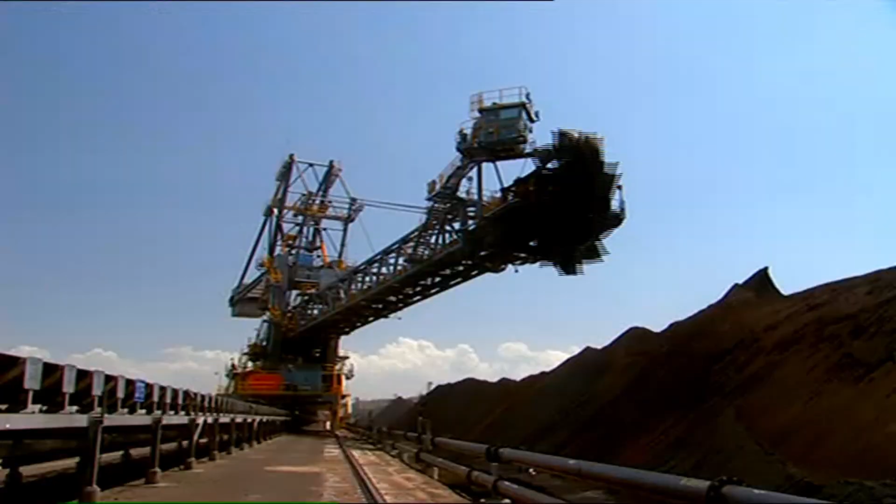I like to imagine things. I like to create things.

The uni course is a lot of fun actually. I found it great.

Engineering's a super job. The world's pretty much your oyster. You can go anywhere with engineering. It's a lot of fun actually.

Take a good look around. An engineer played a major part in the buildings, the bridges, the roads and the machines that we use every day. Engineers create, they find solutions and they push the boundaries of science and technology. A career in engineering is exciting, it's fun, it's cool and it could take you anywhere in the world.

Engineering involves using basic skills in maths and science to create something new that will hopefully benefit other people. It's a university degree course.

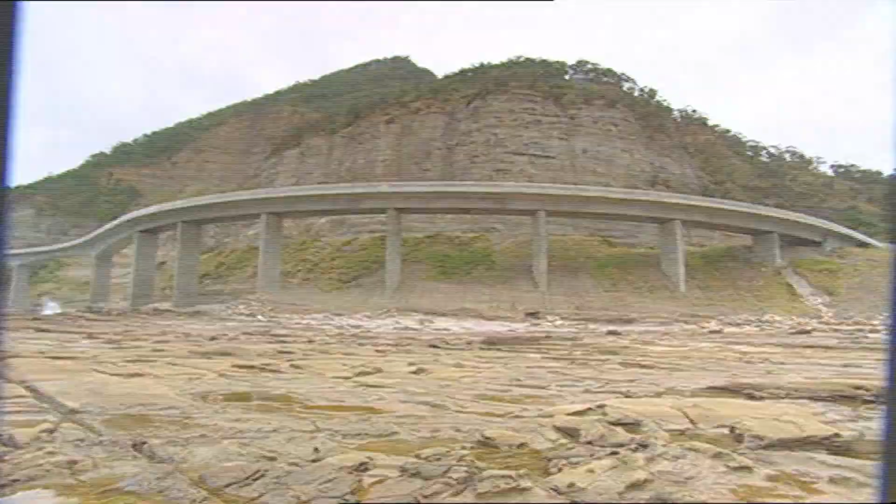This is Telstra Dome in Melbourne. It seats 56,000 people, all with uninterrupted views. AFL games are played here, rugby, soccer, and some of the biggest names in the music and entertainment industry have their concerts here. A couple of unique features.

The seats on this side and on this side can actually slide in and out, depending on the event that's being held here. But most importantly, if it looks like rain, they can simply close over this gigantic roof and make a massive indoor stadium. And this was all made possible by Australian engineers.

I started when I was only 9 months out of university and spent 2.5 years working on the project. Learned a lot of tricks of the trade down here.

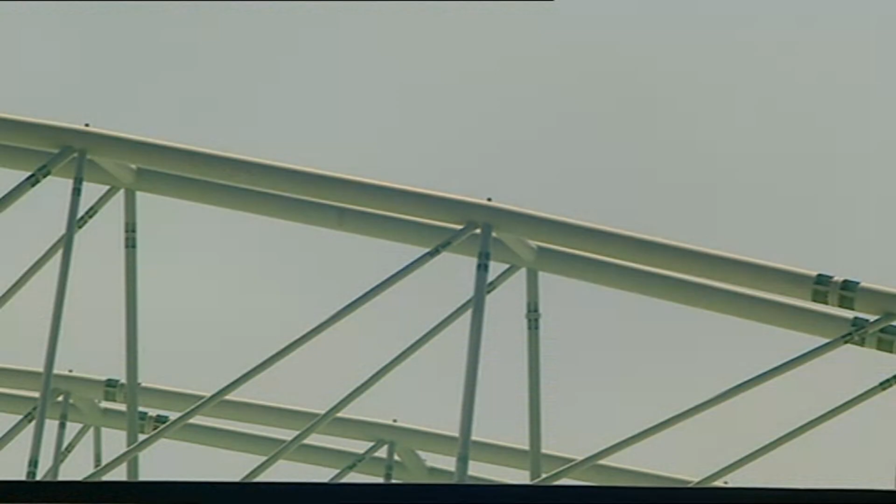Structural engineering, which is the discipline that I work in, is essentially involved in the design of literally the structure required to support buildings. We work closely with architects and builders to come up with systems that will support the building that they're trying to achieve.

Early on in the project I was involved in the design of the concrete superstructure, so the large concrete elements required to support all the seating tier, and as the project progressed I was involved more and more in the site activities, responding to the builders' queries, changes and things of that nature.

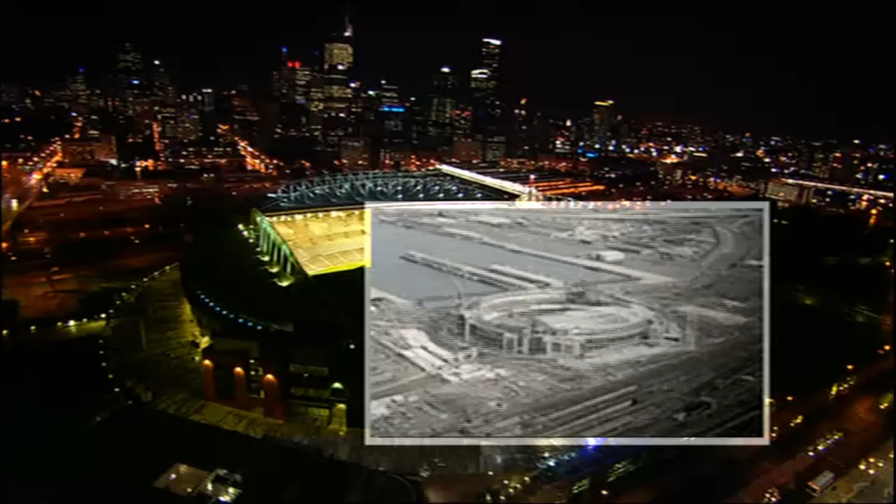The key feature of the stadium is the roof. As I understand it, it was certainly the largest moving roof over a sporting stadium in Australia and one of the largest in the world at the time of construction.

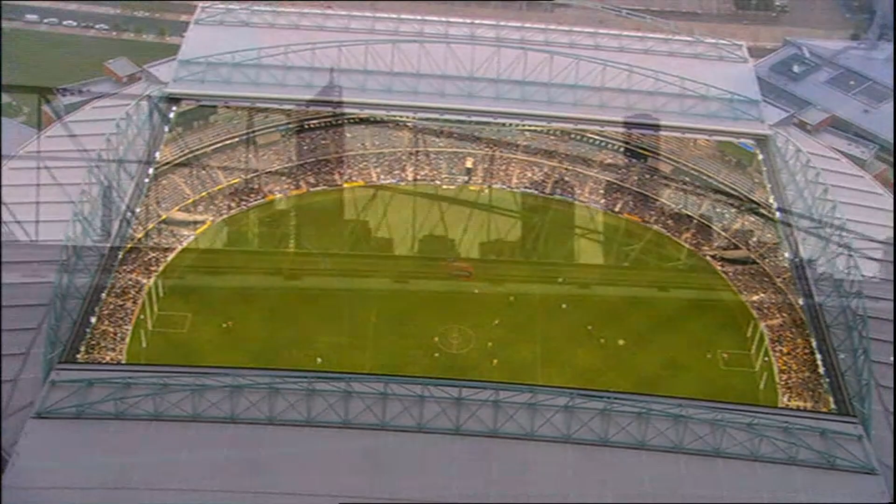We have 4 major trusses that support each of the edges of the fixed roof structure, which leaves a 100 metre by 150 metre opening above the playing surface. And then we have the moving roof which slides over the top of those to close that opening.

The moving roof is supported by 8 sets of wheels, which we call bogies. The bogies actually drive the structure as well. It takes about 10 minutes to open and close the roof. This feature allows all events to be held in ideal conditions, day or night, regardless of the weather outside.

I come here and watch footy with friends and everybody enjoys this experience, and sport is such a part of Melbourne culture, and to be a part of that is a great thing.

There's a little place called Yambuk on the coast of Victoria, about 300 kilometres west of Melbourne, which houses one of the most cutting-edge electricity generating plants in the country.

There's 20 wind turbines on this wind farm. They're 73 metres to the actual hub, the centre of the blades. From the centre of the blades to the tip of the blades is another 35 metres. So in total you've got 108 metres from the ground.

The basic principle of a wind farm is that the wind energy will be converted into kinetic energy, and that in itself will then get transferred into electrical energy in the generator, and the generator is housed up in the top of the wind turbine.

As a rule of thumb, a wind turbine of this size will generate enough electricity to run the equivalent of 1,000 homes. I was the eyes and ears of the client on site, so when there were engineering issues that came up, I would be in discussions with the head contractor about those issues and how they would be resolved, and communicating that to the client.

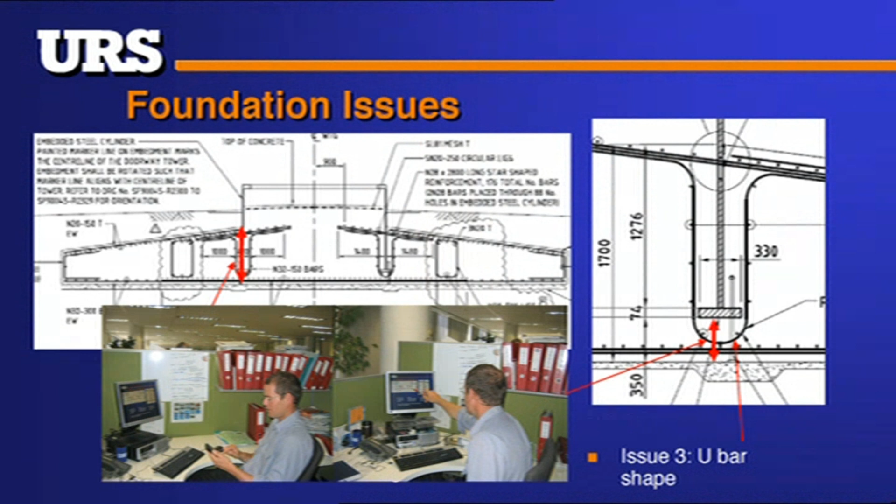The concrete and steel foundations were made to withstand the massive forces generated by the wind. In total there's about 260 cubic metres of concrete there, 60 to 70 truckloads of concrete delivered into the foundation. So it's a huge volume.

Wind farms are basically renewable energy, so as long as the wind's blowing it's producing electricity. Yeah, it's great. It's good to be involved in projects that have got renewable energy, it's benefiting the community and it's not compromising the future generations. And yeah, it's great to see them spinning.

Now, sometimes engineers are asked to come up with solutions to very unique problems. On the New South Wales coast, this road between Clifton and Coalcliff was cut by rockfalls and landslides, effectively isolating the two centres. So a very talented group of engineers got their heads together and came up with this, the Seacliff Bridge on the Lawrence Hargrave Drive, the only bridge of its kind anywhere in the world, 665 metres of pure engineering brilliance.

The new bridge is a vast contrast to the old road built into the hillside. The road would be closed whenever there was over a certain level of rainfall because the road would become so unstable. And in August 2003, the road was officially closed after a very significant rockfall.

A group of consulting engineers came up with 26 options to solve the problem, including tunnelling through the hillside. But the bridge solution was thought to be the best. Essentially, we shifted the road 30 metres away from the coastline, out of the rockfall zone.

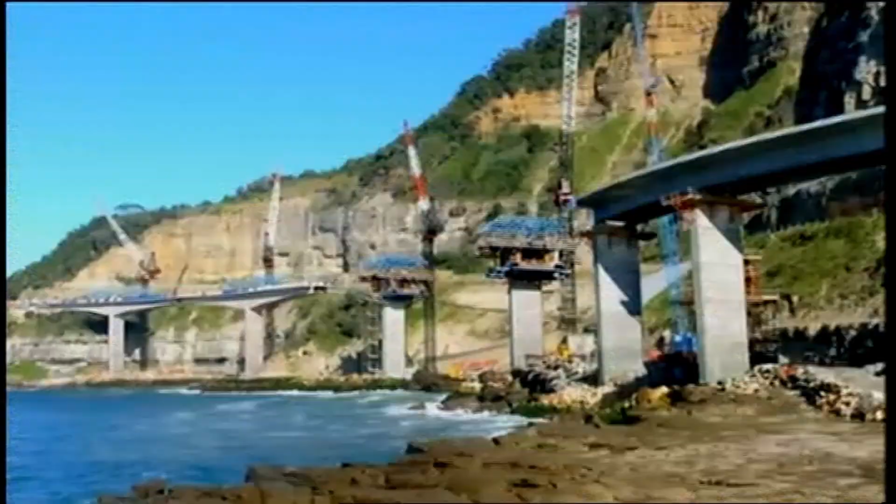The engineering team came up with a world-first method of construction, which involved building two bridges joined in the middle. In order to build one of the bridges, we brought in form travellers over from Europe, and essentially they sit at the supports and you build part of the bridge, and then once that part is finished, they lift up on rails, move out, and then you start building the next section.

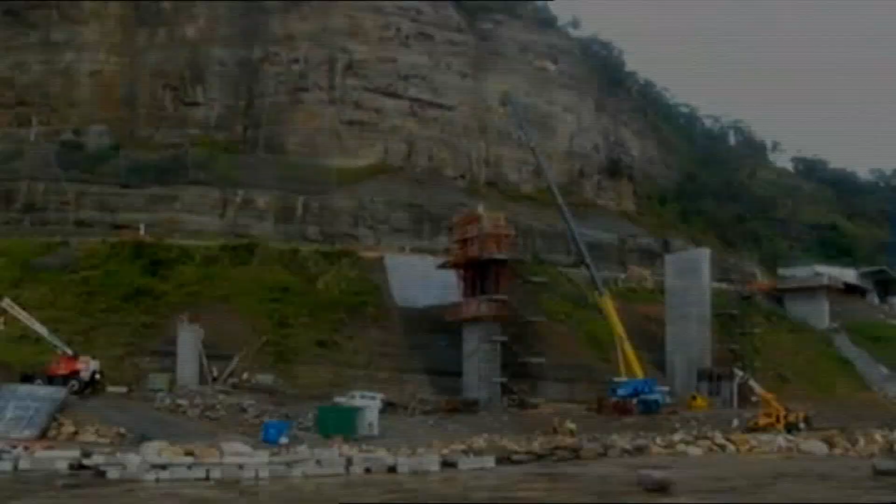The other part of the bridge was built by incremental launch, so you build part of the bridge in a casting yard, and then you jack it up and push it along its supports, and you keep doing that until it gets to the other end of the bridge. It's beautiful to look at, and it's just great to have been a part of.

State-of-the-art engineering was applied to create this unique building: Melbourne's Council House 2, or CH2. It's Australia's most environmentally friendly office building and one of the greenest buildings in the world.

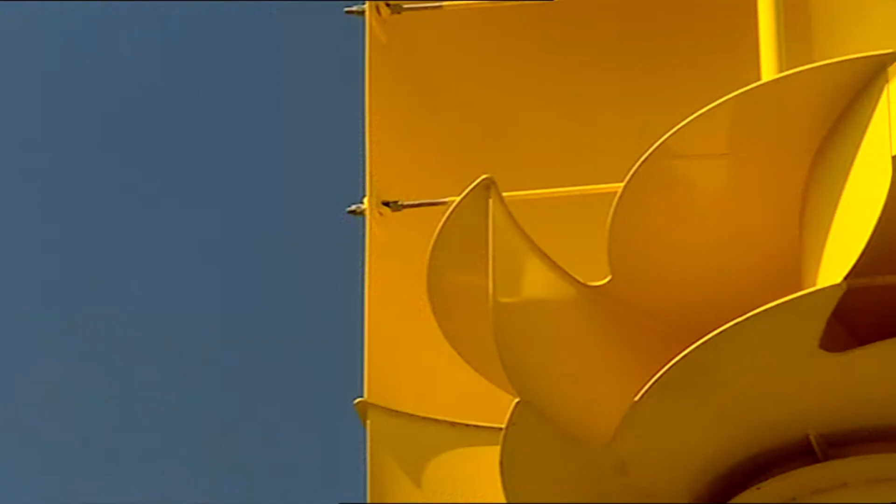We designed the skeleton of the building, the floor structure, the columns, the walls, the floors, how the building goes together and how it stands up.

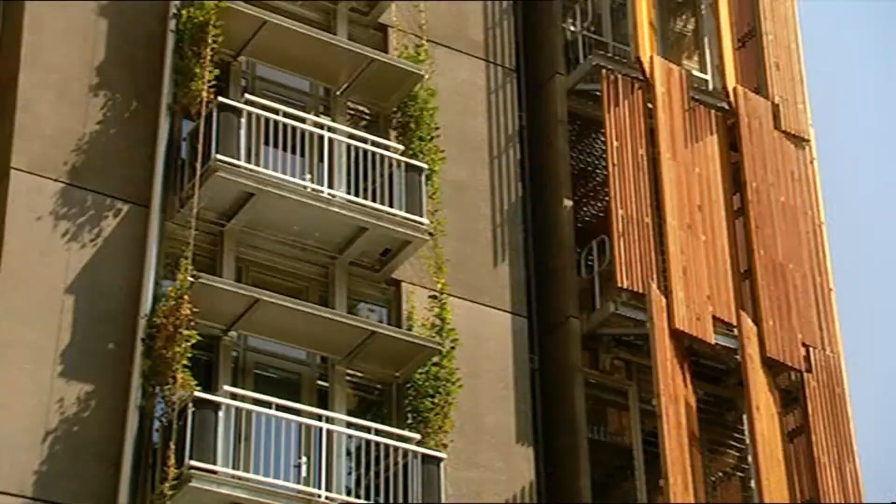All materials used in CH2 had the lowest possible energy consumption to produce. The concrete has a special additive which significantly reduces the cement content. Now, cement production is a significant contributor to greenhouse gas emissions right around the world, so there's a massive benefit to the environment.

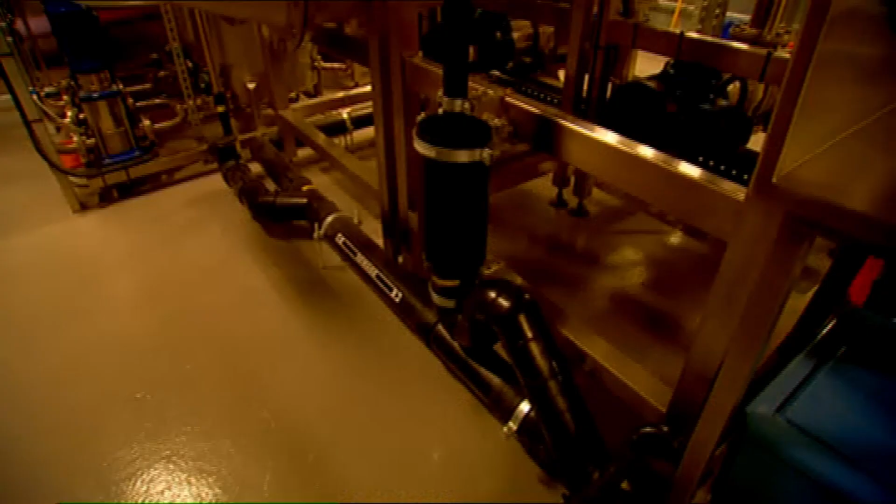The recycled timber slats on the outside of the building move with the sun to provide shade, which helps cool the building. Sewage water is cleaned and chilled, then run through panels in the ceiling. This cools warm office air as it rises, circulating cool air through the building.

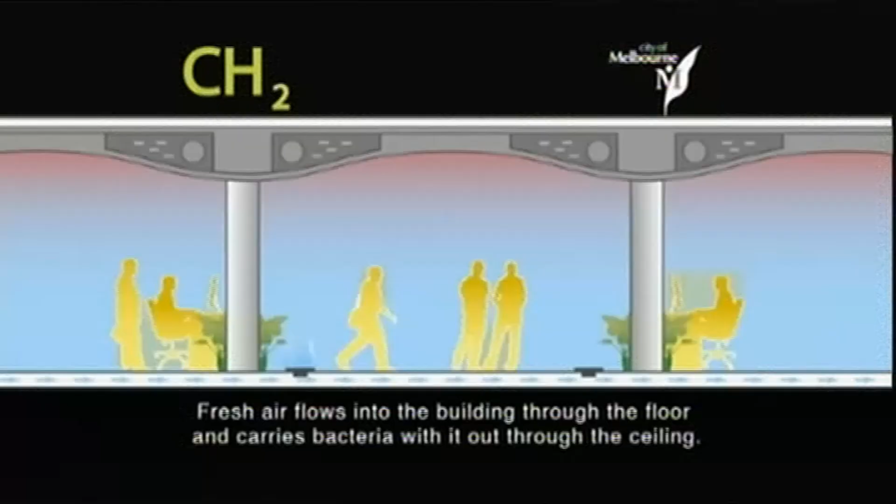100% fresh air is ducted through the floor and exits through vents in the ceiling. Water falling through these shower towers cools the air within the tubes. This cool air is then used to air-condition shops at the bottom of the building.

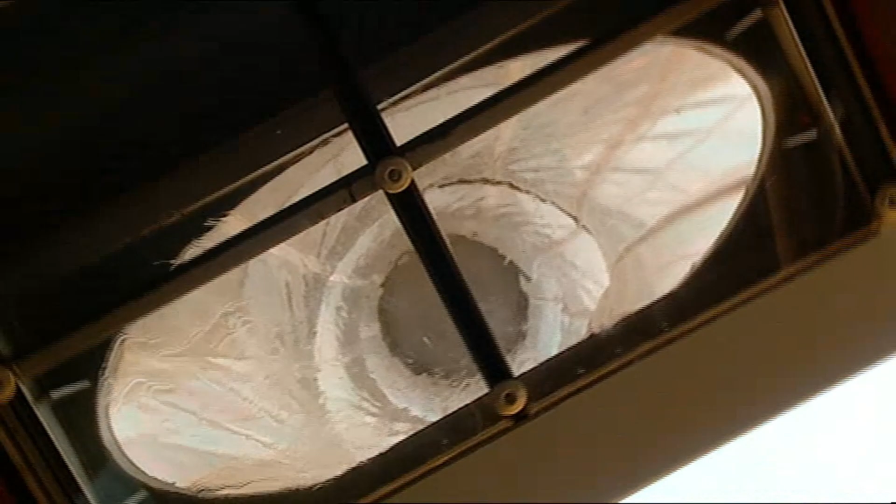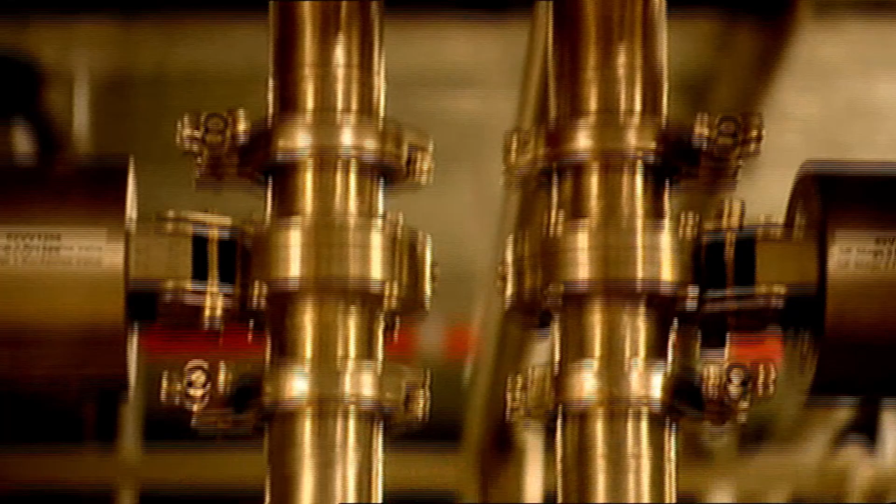The occupants will work and live in a healthy environment. The council is hoping that this flagship will set a very good example for other commercial developers. I feel very proud to be involved in a project like this.

Gerald Stewart often gets to work with rock stars and celebrities in his engineering job, designing studios for recording companies and radio stations.

I guess the difference between an acoustic engineer and a sound engineer is the acoustic engineer actually makes the environment, and the sound engineer makes the sound. I got into it with a love of music. When I was about 9 years old, I had my first guitar. Gerald designed this state-of-the-art mastering DVD authoring studio at Sony BMG in Sydney.

It's used to produce 5.1 surround sound for DVDs. The aim of the design was to make the sound as smooth and clear as possible right in front of the console, where the sound engineer sits when mixing music through the 6 speakers. The room is designed so that it actually moves bad sound, for want of a better word, to somewhere other than where the engineer is sitting.

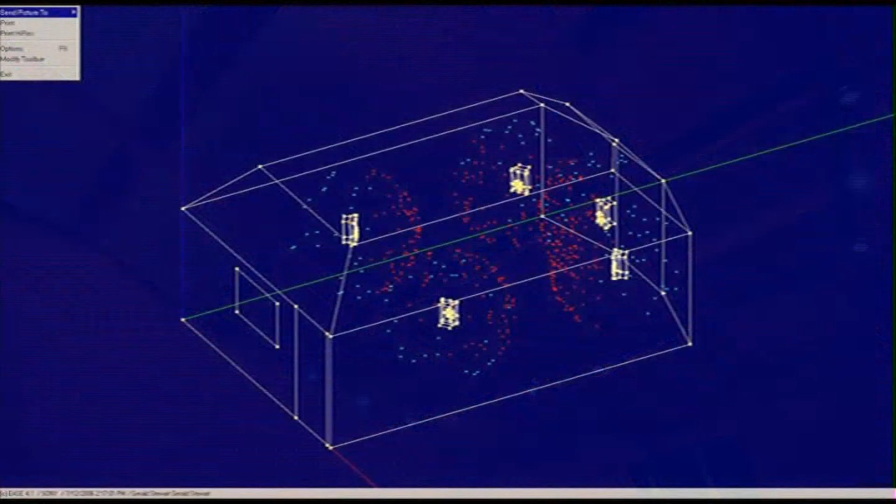The walls and ceiling have special shapes and surfaces that either reflect or absorb sound waves to create that perfect sweet spot right in front of the console. This jagged surface has got a slot in it, and the sound that it's going to take out is a dipping of my voice, and you can hear how that's actually sucking quite a lot of energy out of the low-mid frequency. Next one along is a full-range absorber. You can hear how it really softens and it deadens what would be a bright surface down to very dead.

The floor is flat and smooth, providing an unwanted reflective surface. So the ceiling is actually developed up so that it actually reflects energy and reflects sound away from the floor. I guess from an engineering perspective, it's nice to look back and go, I did that.

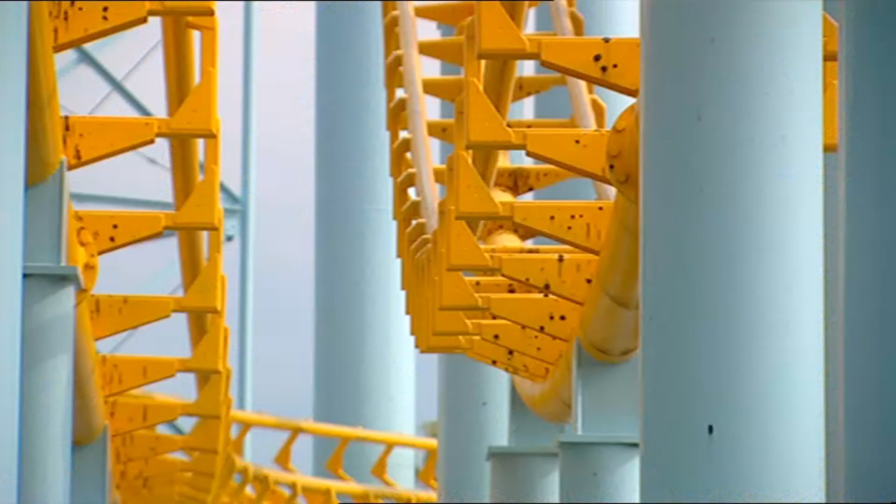People think that engineering is all about sitting in a quiet office, crunching numbers and writing reports. But I'm here to tell you that couldn't be further from the truth.

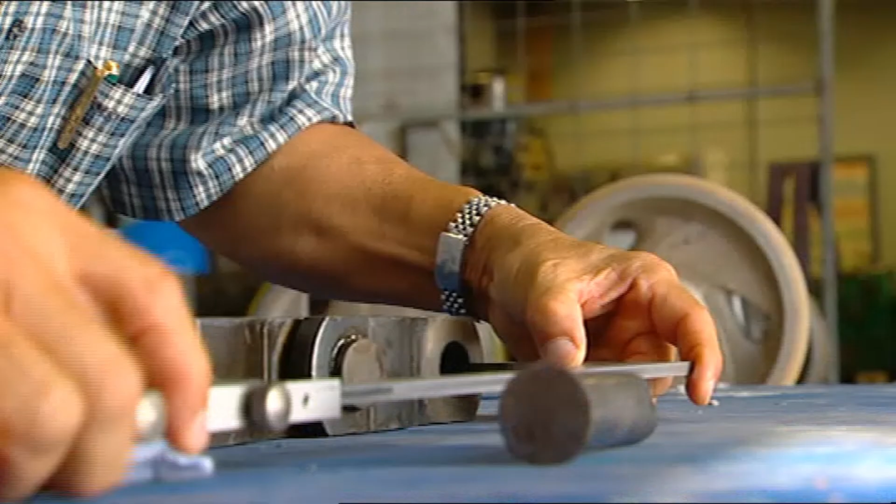Oh, it's a great job. Well, I get to do many aspects of engineering, not what you would face in a normal engineering job. Bob Tan heads up the engineering and maintenance team at Dreamworld on the Gold Coast. In his role, he spends his time travelling the world, finding the latest thrill rides, then supervises their construction and maintenance here at the park.

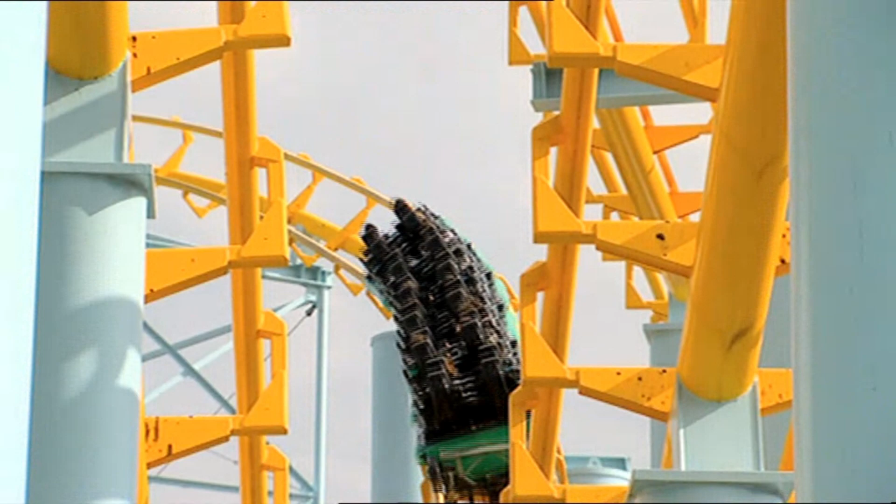This job here is very different and we have many engineering challenges. The Cyclone roller coaster is 13 stories high, 800 metres long and reaches speeds of more than 80 kilometres an hour. It had to be built strong and safe.

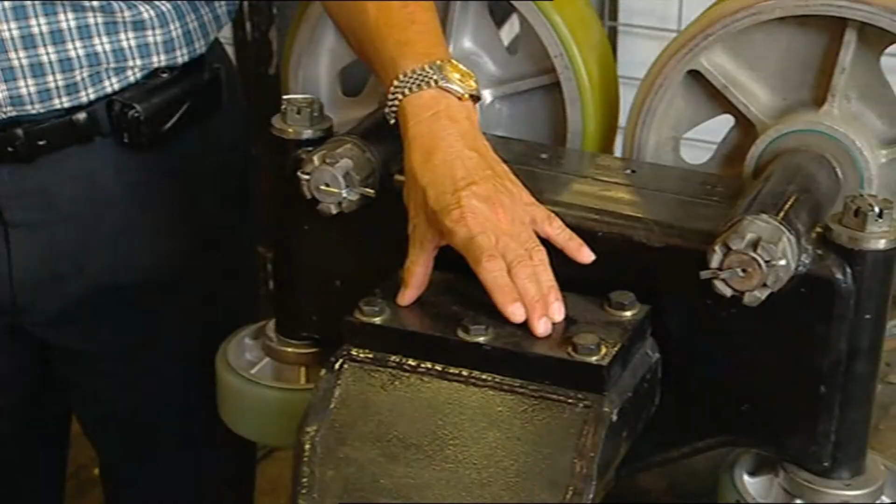In a roller coaster, there are safety factors that range from about 3 to 10. In simple terms, if it only needs to be so strong, it is between 3 to 10 times stronger. The track itself is sort of self-supporting between columns. You see, it's a little mini truss.

The other thing you would note is that bolted connection. They are usually made up of multiple bolts, so that there is redundancy in if any of the bolts should break in time. The extreme load or pressure on the carriage is really at the point before it goes into the loop, because that's where the maximum change of direction occurs, and that's where the highest stresses occur.

Bob Tan is an engineer who loves to see people enjoying the result of his work. It gives me a great sense of achievement when we finally commission a ride and complete the attraction, and the first lot of riders go through and come out smiling.

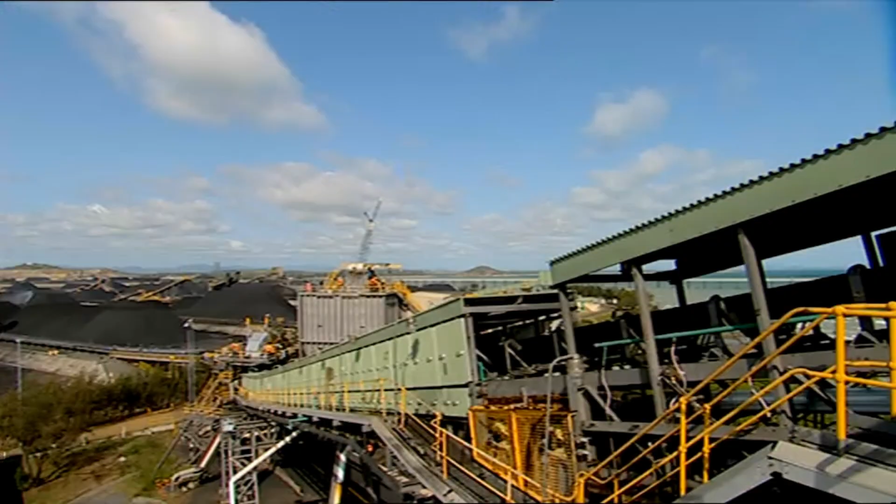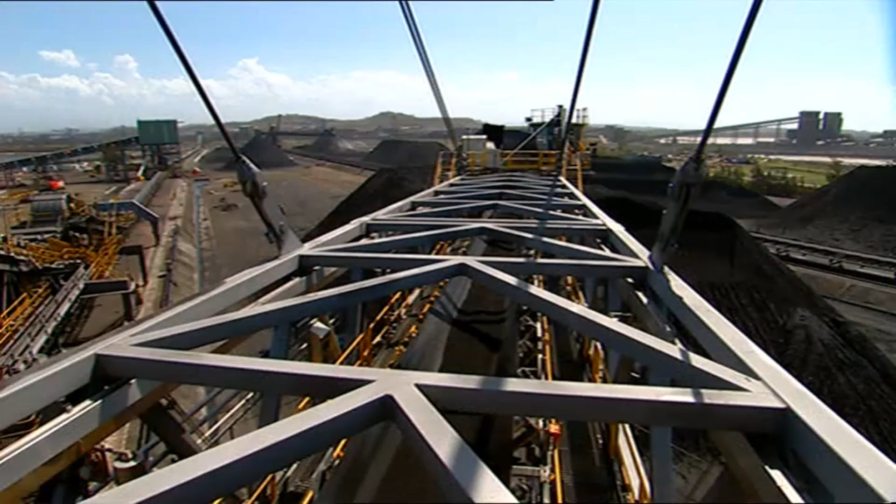The Hay Point Coal Terminal near Mackay on Queensland's north coast stores coal from major mines, then loads it onto ships for export overseas. This massive site is a great training ground for young engineers.

I'm a mechanical engineer and I work with the design team, the people that design upgrades to the terminal. And I'm here supervising some construction, helping them sort out any issues that they have during construction.

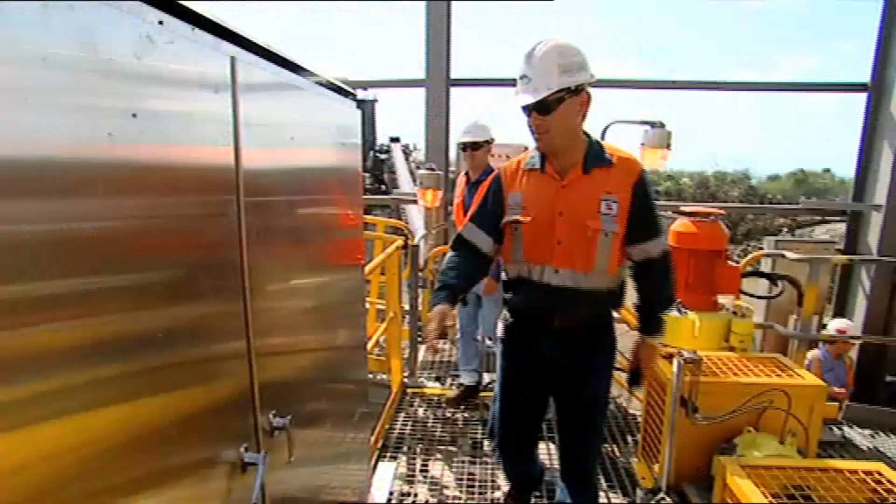Engineering is really about problem solving. Being able to get out there and see where the issues are and sort a solution out is probably a very important skill.

The stacker reclaimers here are very interesting from an engineering perspective. This is one of the largest stacker reclaimers in Australia.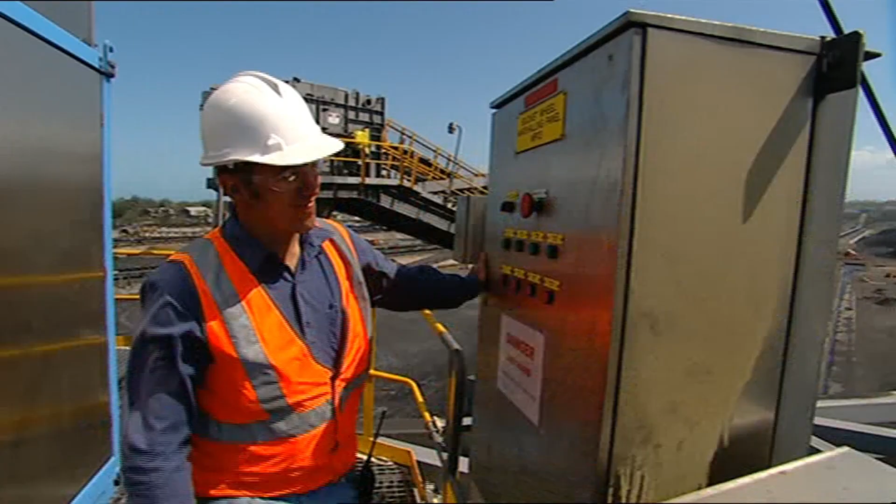What it does is it places coal into a stockpile and then it can pick it up again, put it on a conveyor. This stacker reclaimer is capable of around about 4,500 tonnes per hour reclaiming and up to about 6,000 tonnes per hour when it's stacking.

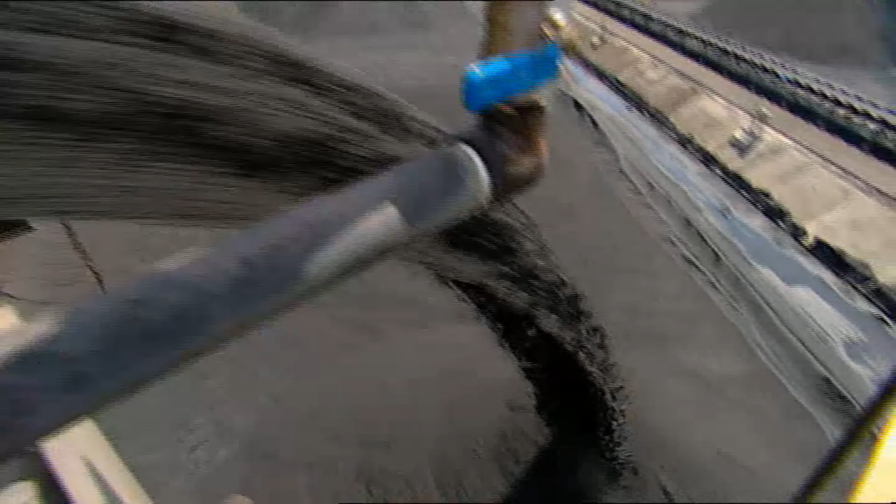As far as size goes, the boom itself is about 50 metres long, so it's about the size of an Olympic swimming pool.

Mechanical engineers design things on stacker reclaimers such as the conveyors. They also design all the drives that allow the machine to move, to rotate, and lift the boom up and down.

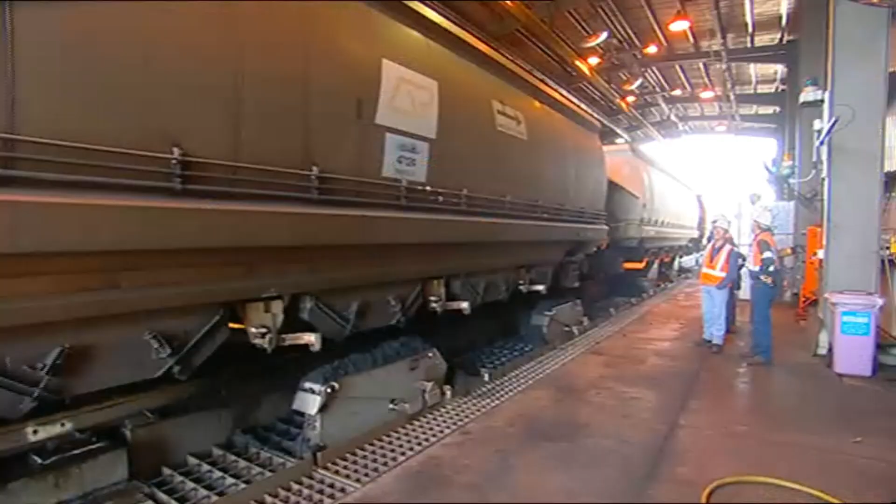I think all big machines like these really show you what engineering can do, and that engineering is all about people working together. It's a lot of fun actually.

Jonathan Wang is a young Australian engineer specialising in high-rise buildings. He's employed by an Australian company but has worked on cutting-edge projects all around the world.

The Latitude building in Sydney CBD was one of his major works. My role in this building is to design the vertical element of the building, okay, the columns. I came up with the way of how to build the building.

The building stands 52 floors, or 211 metres tall. It's great to be back here to have a look at a finished piece, and I'm very proud of this project. It's really, really good.

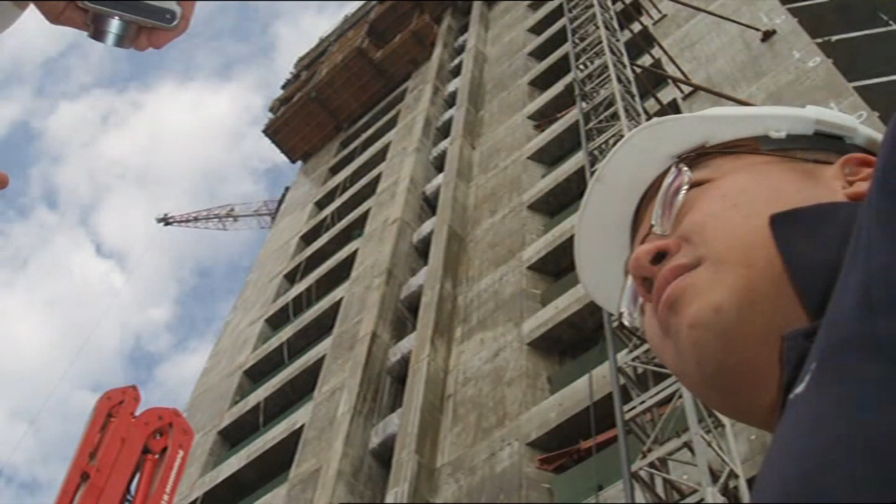My role in this project is, number one, to complete the structural analysis of the building. Anything to do with the stability system of the building, that's my responsibility.

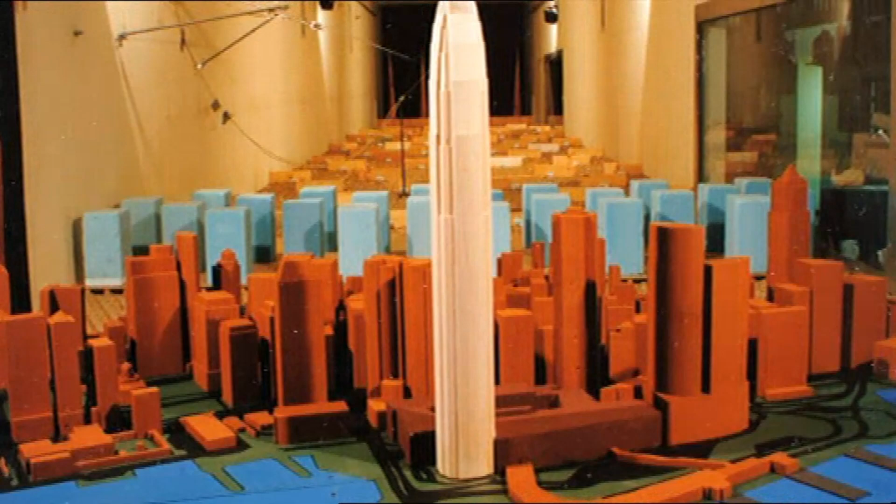Jonathan is involved in wind tunnel tests to make sure the building will withstand massive wind forces above 300 metres. It actually gives us a level of comfort to understand what the building will do when the wind hits it.

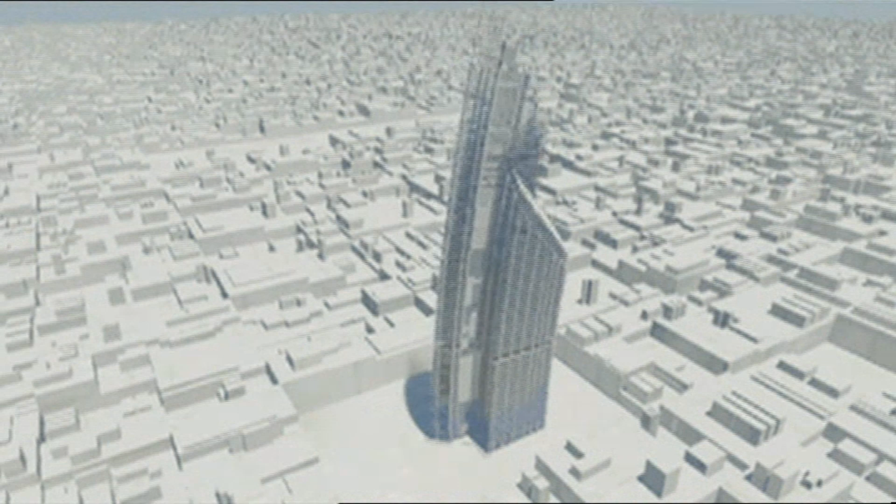He'll spend several years overseas while working on the Burj. Well, living in Dubai is quite an experience actually. Certainly it's a good one. It's a lot of fun, meeting different people.

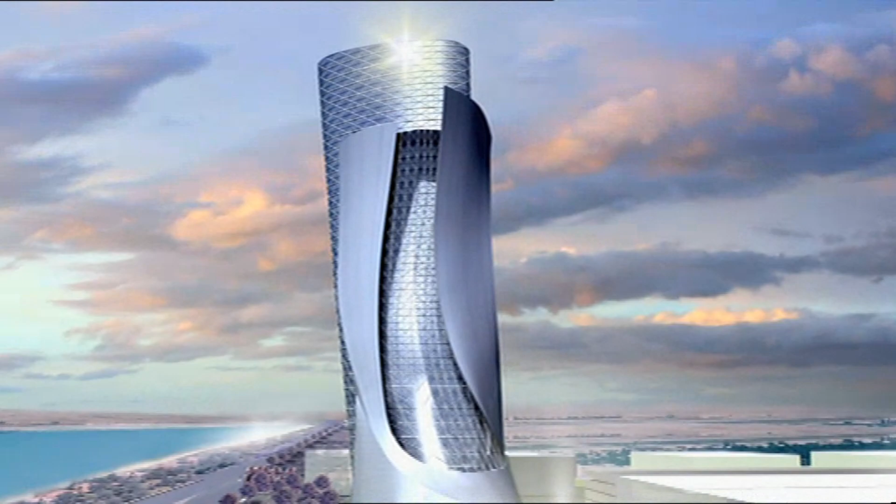It's kind of cool. What I really want to do is to do something which has never been done before. Certainly going the tallest, the biggest. It doesn't probably match, in my terms, it probably doesn't match the funkiest, the coolest.

Jonathan is currently working on buildings with no form or set shape. I'm actually involved in quite a few of this kind of crazy building, if you like. I've actually designed a twisting building.

I think people have a wrong perception about what engineering is all about. I think engineering is actually a very creative thing.

What kind of person makes a good engineer? I think you have to be creative, a little bit crazy maybe, dare to challenge yourself. I think one thing I would really emphasize is make your imagination become a reality and make it happen.

You need to have common sense, you need to be keen to be challenged. Engineering is really about problem solving, and being able to get out there and see where the issues are and sort a solution out is probably a very important skill.

Absolutely love it. Why? I'm an acoustic engineer. So it's actually, you're using your intelligence to give something back to people. Maybe it sounds a bit noble, but that's what engineering is all about, making things happen for people.

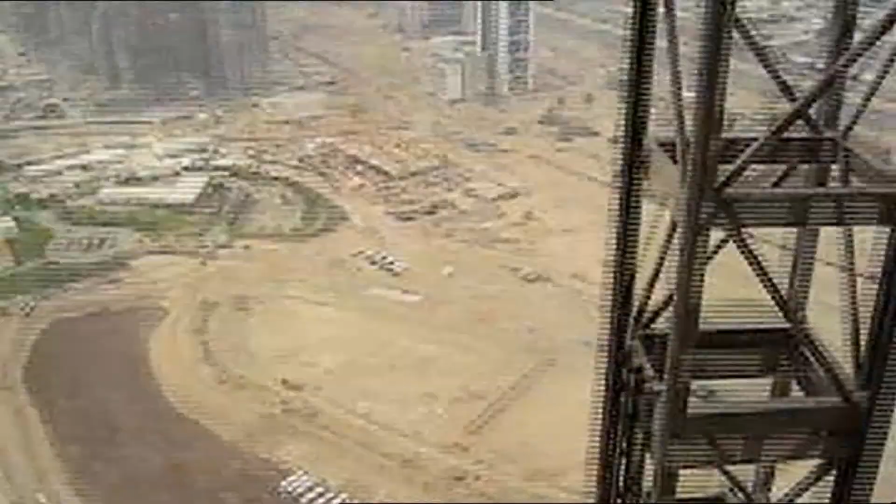So if you think you might like a career that combines creativity and science and working with others to come up with clever solutions, and could see you working on anything from the world's tallest building to a sound studio, a sports venue, or even a roller coaster, anywhere in the world, then think about a career in engineering.